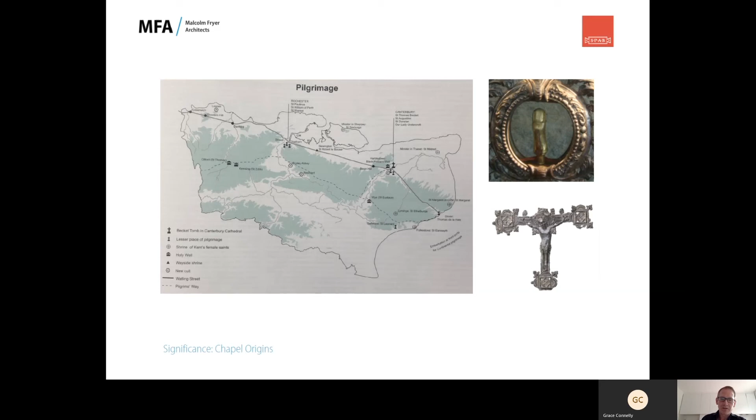What the chapel may have housed as part of that pilgrim's trail is not known, but there are all sorts of theories. It's very important as part of this pilgrim's trail through Kent, and how that has evolved over time in its relation to Boxley Abbey proper.

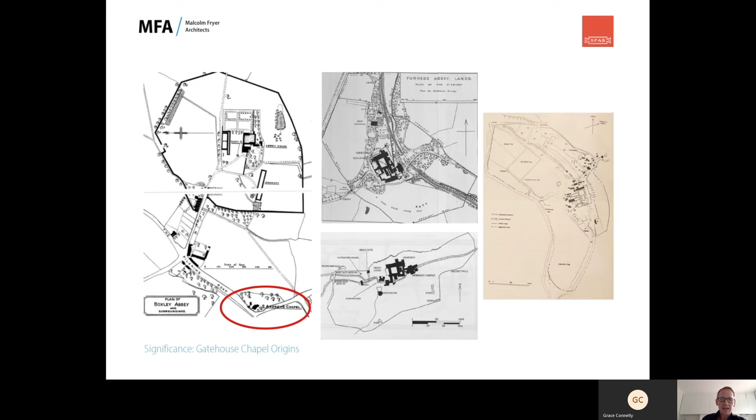So the chapel is here on the outer precinct, with the abbey within the inner precinct, and how this has evolved over time as the abbey was converted and the lands changed. The chapel has always held this pivotal point at the junction of several important roads, so we're trying to get an understanding of its relationship to the abbey and its precincts, and then looking at other comparative examples of Cistercian gatehouse chapels.

This gives you a sense of the scale we're dealing with. Obviously there are examples around the country: Coggeshall, Croxden, Rievaulx. Rievaulx is probably the most comparable in terms of size to Boxley, but really very, very small in comparison to some of the other ones that exist today.

There's also, interestingly, a timber-framed element attached, which could predate the chapel, which would again make it very unusual compared to the other comparative examples.

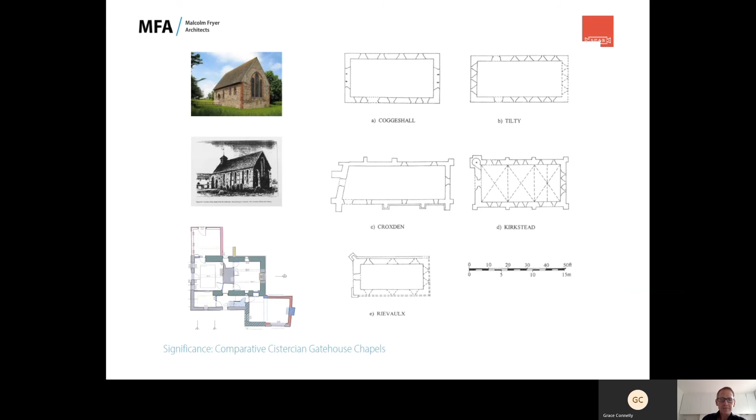And then we have other map evidence, truly trying to understand its setting as the abbey of old as a country house. But again, the chapel sits at this very interesting junction of three roads, and has quite a prominence to the south and to the west.

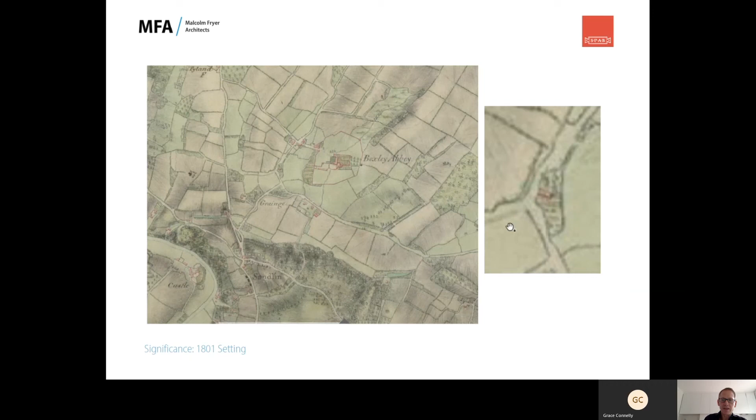We've done a bit of map overlays, looking at the changes that occurred during the 1800s and early 20th century, and how outbuildings started to be produced. We've overlaid with the existing map, and it was quite important for us to understand outbuildings and the different uses of the chapel. There was a post office in the early 20th century, and the outbuildings related to that, because that's part of the archaeology and an important consideration for how the site might be set out in future.

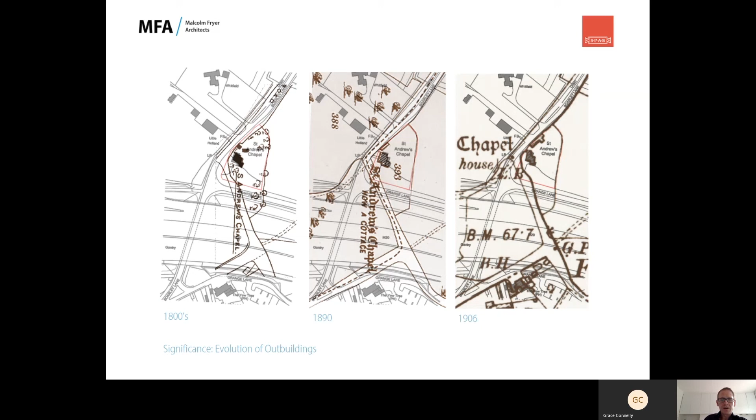So what we've got from these overlays is what we've got today, but looking at these historic maps, certainly from the 19th century, we've got a lot of outbuildings. That's quite important, with some longer ones along Grange Lane, and some earlier, smaller ones that were potentially additions onto this one.

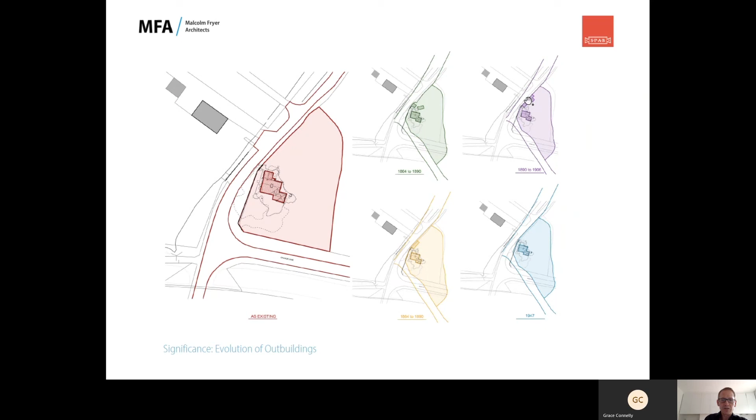So we know there were some significant outbuildings to the chapel during the 19th and 20th century that aren't there today. And then we have a couple of key views from before 1892, the works that were carried out there, and we have an 1892 publication by Kate Brown, which gives quite a good written description as well as a drawing. So these are the two views that we have.

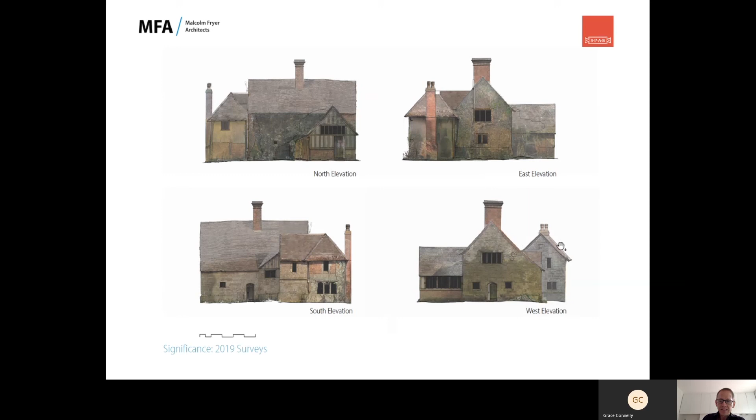But certainly the origins of the chapel are very clear in the volume as you break it down. And certainly the east window shows much more clarity in the brickwork now that the ivy has been removed, and the monastic outshot is much more evident.

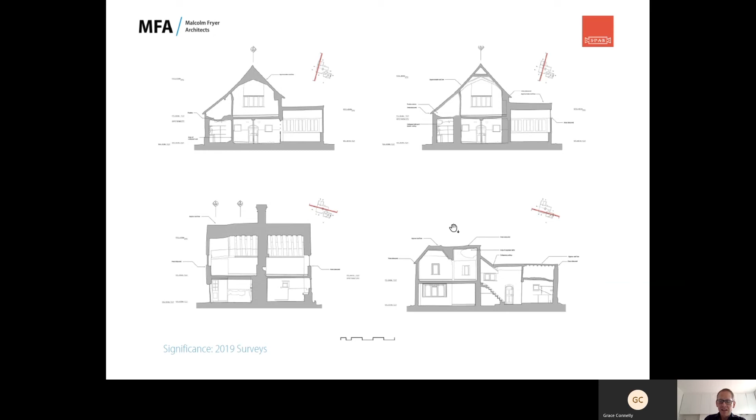Using digital technology has been extraordinarily useful. So going back to significance, we know the three key phases of evolution. We obviously have the monastic period, where we had the monks, the priest lodging.

I'm not entirely sure about the origins of this timber frame. It's not of a quality that matches the rest of the chapel, which raises a lot of questions about its origins - it's potentially reused or brought in from somewhere else. Like many timber frames, they were very modular and could be easily relocated, but we're hoping some of the archaeology will reveal itself through roofing works, etc.

So this is ground floor, first floor. We have the monastic period, and then the post-Reformation period where they added the aisle. Effectively, they pushed out the southern wall and the western wall in very high quality ashlar, then inserted this enormous chimney through the middle and created four rooms, two on each floor, as well as service accommodation on the lower floor.

The exact layout is still slightly unclear. There was potential that it was two dwellings at one point, but it's likely that there was a partition through here, and that the timber frame stood relatively independently here. We don't know entirely what's going on yet, but we hope it will all reveal itself in good time.

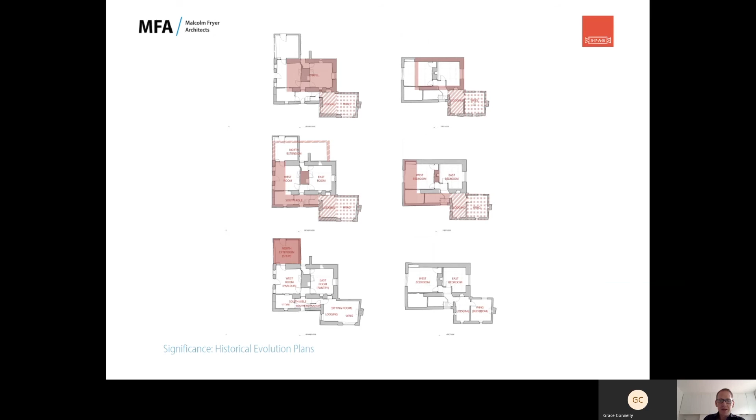So in terms of making sure we truly understand, we produce what we call significance evolution plans - historical evolution plans - really trying to make sure we absolutely understand the different phases of development. Susie Whitmore in our office has worked very hard on getting her head around it all from the various sources of information, and we believe this is an accurate summary of what we've got.

As I say, the big questions sit around the timber frame and its origins. We know it's early, but we don't know if it was part of the original chapel and priest lodging, or whether it was relocated there at a later stage. But certainly understanding some of the 20th century interventions, we know we've got pretty much an entirely new floor through the whole house, from that period of the late 19th, early 20th century work.

A lot of work was done then, and we think that there's a remnant of what was that earlier Pentice addition from before the post office was built in the early 20th century.

Hopefully I'm not racing through this too much. Matthew and Graham's talk gives us a lot more information on the history and significance of the chapel, but it's really important for us to get our head around all of this before we start work on repair and thinking about interventions, so we have the clearest understanding.

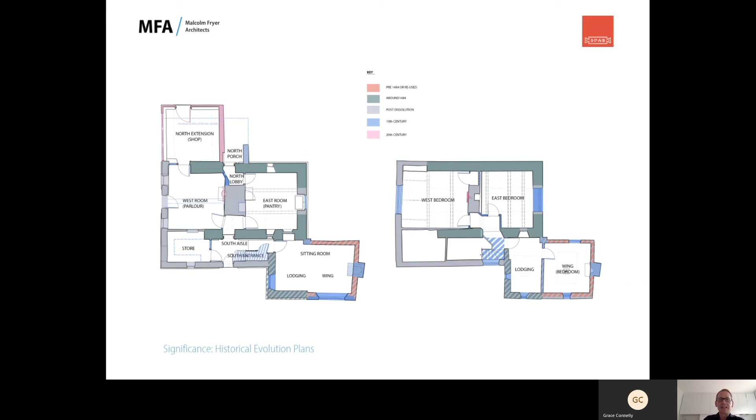And then something that's quite controversial for the SPAB is significance plans, where we try to rank what's the most important, between high, medium and low, and how that should inform decisions that we make.

As I say, the SPAB don't sit comfortably with the idea of significance. The SPAB approach is about valuing layers of fabric and development, and the idea that some layers are more important than others does not sit quite comfortably with the SPAB approach. But we still feel it is an important thing to do. It's one tool in a palette of the work that we do, but it does also start to create potential for where we might think about intervention.

So a lot of thought about high, medium, low significance. The low elements tend to be the more modern ones, the fireplace that's been relocated here, and certainly the post office. And then the highest, obviously, being the origins of the chapel, but also the post-Reformation stage as well, which are a really important part of the history of the building.

So I won't dwell too much on that, but yes, significance plans are important. But they are something that is challenging in terms of the SPAB approach to appreciating all layers of fabric and development.

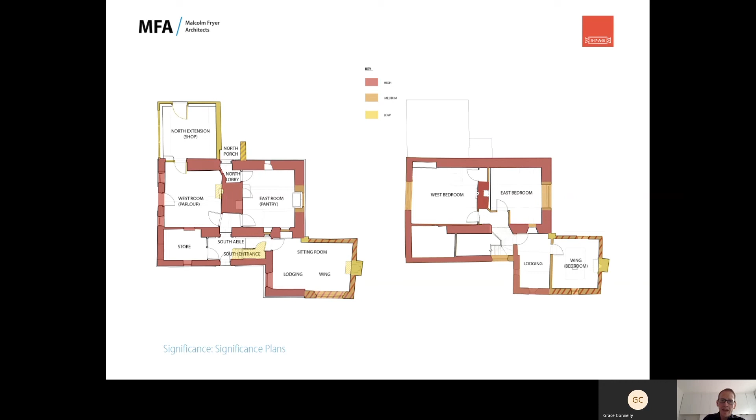So, and then we've got the setting today — well, it says 2019, but it hasn't changed. The motorway works of the late 20th century have completely altered the setting of St Andrew's Chapel, and are really probably the main contributor towards its becoming disused.

But it sits — when we first came across it, it was a house in the woods, completely overgrown. Didn't know it was there. This massive Leylandii hedge, but also a lot of self-seeded planting around the site. But the site is effectively this corner here.

So, a really challenging setting, both in terms of the access, which has been completely altered and restricted, but also in terms of the acoustics, the issues which are created by this motorway, which is raised, and there is now an underpass under here.

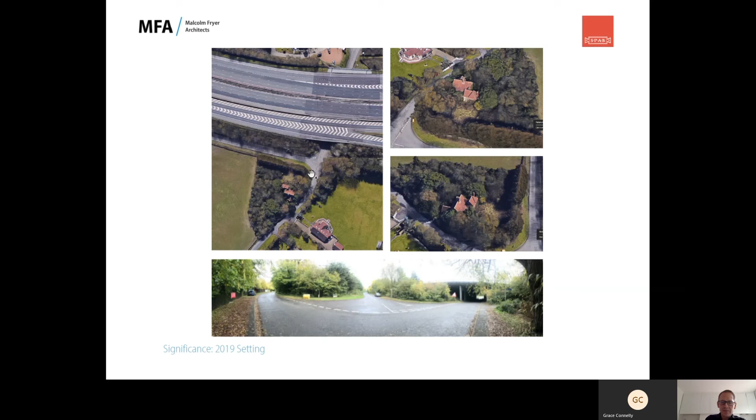I'm sure there's lots I should tell you about the setting today, but certainly the best thing that the SPAB have done — well, they've done lots of very good things — but certainly the immediate things that we did was starting to clear some of the planting on the site, so that the chapel revealed itself once again.

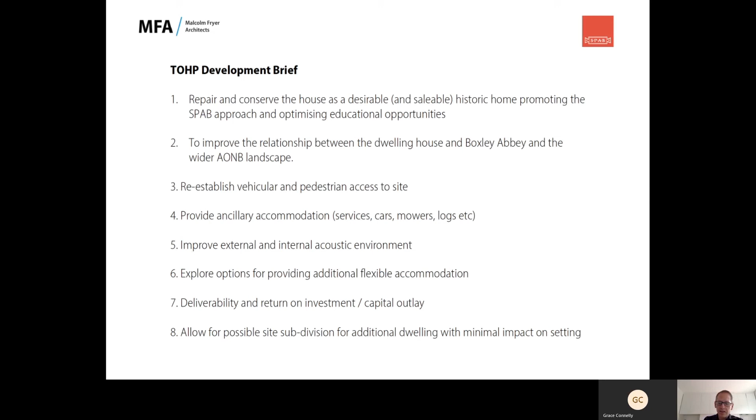And we've also been challenged to see if it's possible to subdivide the site and get an additional dwelling, which wouldn't have an impact on the existing one, and that's something we have looked at - not just about helping to offset some of the costs of repair, but also to address the importance of all sites being part of the housing crisis, and whether they should be able to address it in some way, or that maybe the second dwelling was a way of keeping the existing dwelling more contained and not having to extend it in some way. So looking at various options for the site has been a really important part of our work.

And I can't not go over the SPAB approach, which is incredibly important to all of us as scholars, and it really is about low intervention, about the use of the right materials. It's about retaining as much historic fabric as we can. It's about appreciating the patina of age. It's really about repair and not restoration.

I will go through the list, but actually I'm not - it's a respect for age. But the most important one, I think, for us is this essential work only. We're looking at things like the roof, whether we need to completely replace it to do upgrading work, or if there's a way that we can undertake gentle repair that will prolong the life of the roof and keep its wonderful character. And so there's been some big discussions.

Getting the materials right, proven methods, the importance of good craftsmanship, but also certainly an important part of our work is about good new design and how it can complement the old. And then looking at emergency works and making sure that we are getting on with everything we need to at the moment.

I would highly recommend the document that's been written by Matthew Slocombe on the SPAB approach, which gives a bit more detail about how the philosophy is applied to architecture projects, and makes the manifesto slightly more accessible in terms of the way that we can apply it to projects.

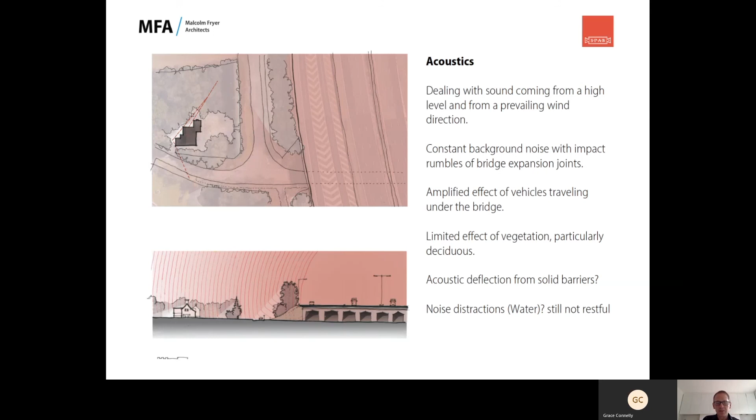So it started us thinking about how any development should try to extend that acoustic calming effect of the site. So a big part of our site layout has been about thinking how we can address the acoustic issue.

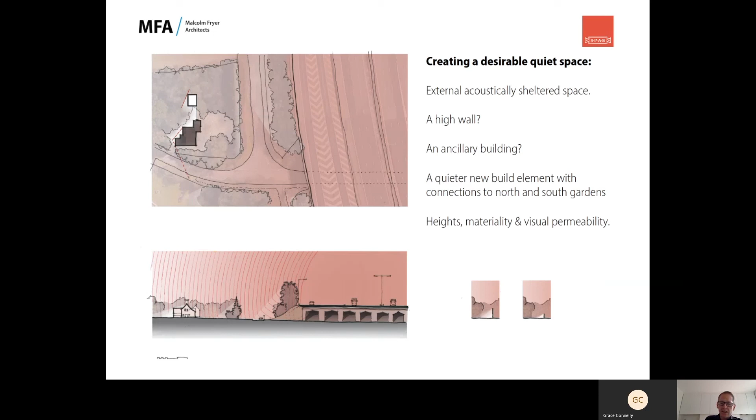Given the southern approach, with the existing pedestrian gate and the post office addition, off the new road, Grange Lane, our instinctive response was to restore a southern approach and think about getting ancillary buildings in this location. The main entrance has always been from the south as a dwelling house, and we felt that was quite important - I talked about that elevation that is so incredibly charming. There is a secondary elevation to the road to the west, which has the historic post office entrance.

But we felt that reinstating this as the primary vehicular entrance made sense - this is a much quieter road, whereas the other is a bit of a rat run. It felt like the right thing to do, restoring some sense of the setting of the house, and thinking about where ancillary accommodation may help with some of the acoustic issues. It also made sense, if you subdivided the site, to have access on the two outer corners. So that was our initial response.

It's been interesting that it hasn't changed very much, and we now have this permission in place to get that new opening, which is going to be very helpful for undertaking some of the works we need to do in the immediacy.

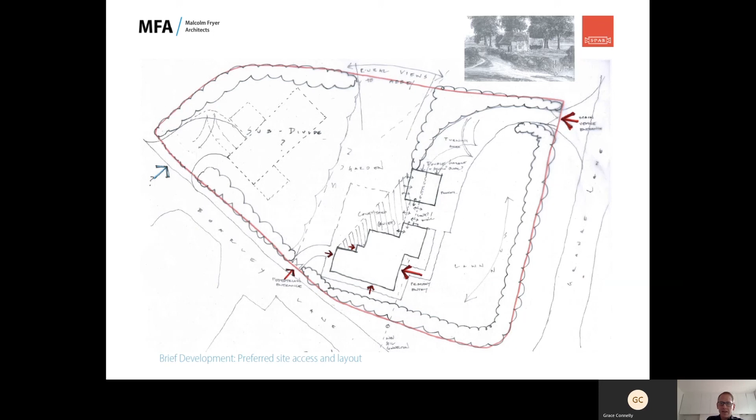Then it was about thinking about the house, and again where the entrance might be, really doing as little as possible in how it might be laid out - where the kitchen might go, where we might get services, all trying to stack up the services. There were two options really: we either had an entrance via the old post office from the north,

and that would bring all the plumbing around from that way. But we actually felt that with all the structural considerations, reinstating an entrance to the south, with a secondary entrance from the north, really worked quite well in terms of the layout of the house - two reception rooms, using the post office as a study cum garden room, and using the one really decent sized space on the ground floor as a kitchen and dining room, and how that manifested itself.

Where there are structural issues in this southwest corner, we looked at how we could potentially get a small bathroom as an ensuite to the upper floor, and a utility room - we'll talk about that later - using the intervention in this corner to hopefully deal with some of the structural issues also. We felt a lot more comfortable with this southern entrance intervention, having 3 bedrooms upstairs. There is the challenge of how to create a bathroom, which I'll talk about more, but certainly we have moved forward with this option with the southern entrance.

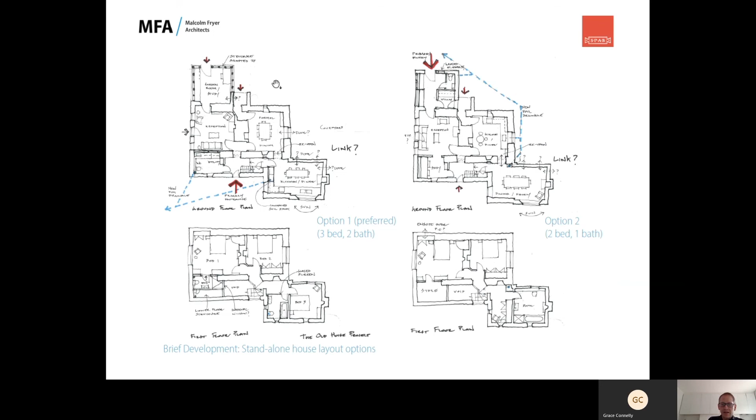At the moment, what we're looking at is a layout with very few changes: two reception rooms with a central fireplace visible from both sides, reinstating that main entrance, and turning what was the post office store into a utility and downstairs loo, with a tiny ensuite above it.

That does involve doing some substantial work on that floor too, which we're hoping will be combined with the structural improvements that we need to do.

It's then looking at potentially making a new opening from this garden room here, and reopening the entrance that's been blocked between the priest lodging and this reception room, so that this would make a really great kitchen and dining room with a connection back to these reception rooms.

It's a very low intervention layout. As I say, there are about five changes. One is reopening this historic opening. The second is about this corner and stacking up all the bathrooms.

Stacking the utilities on this side of the site means we can get a fairly easy run out. The advantage of having the kitchen down here is that any bathroom waste and plumbing could all be internalized and kept within the reversible joinery, so nothing would be seen on the outside. It's a very low intervention alteration.

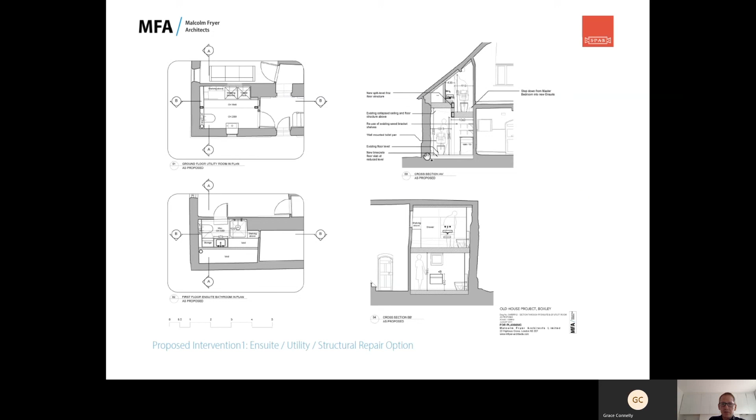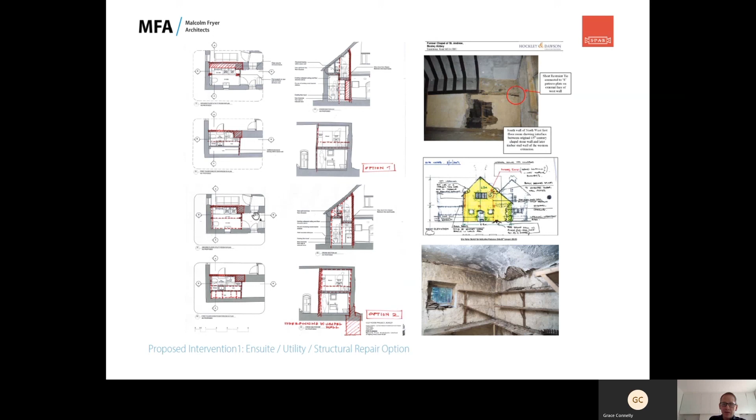So again, it's about how we can use it to address this major structural issue on the upper floor. As I say, this is the lower floor where you can see the dilapidation, but there's a real need to tie the historic masonry back to the earlier chapel masonry, and we're hoping we can do that while introducing new facilities.

Then, slightly more controversially, is how you might partition a bathroom in a space of significance. It might be a little too New York lofty for Boxley St Andrew's Chapel, but it's about how you might introduce a screen to bring a bathroom into this space, which is not insignificant.

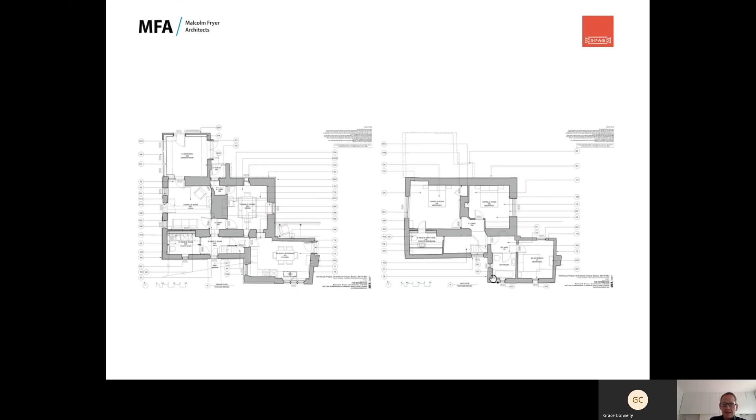We want to make sure we can still appreciate this space while getting the connection through to the all-important third bedroom. So the intervention would be a reversible glazed screen here to create a second bathroom.

I think it might be played down a little and maybe just glazed on top, but the starting point is something relatively translucent that allows you to appreciate the volume of a room, even though it gives you some acoustic and visual privacy.

And then, looking at reopening this blocked opening, which was between the chapel and the priest lodging, that will effectively be between a reception room and the kitchen and dining area.

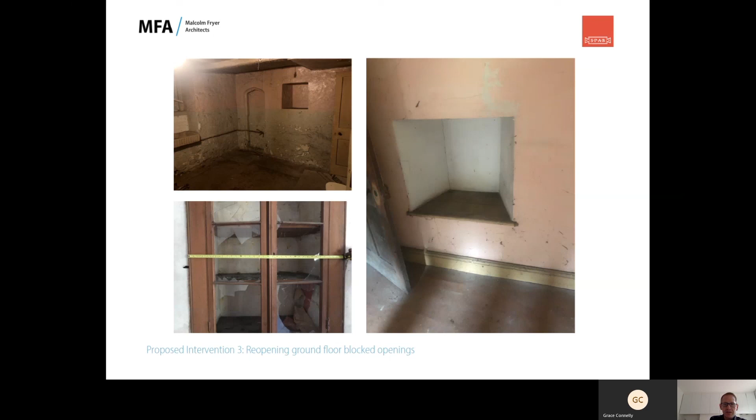And there are elements of 20th century joinery that we would definitely need to look at how we could reuse, and that's on the other side of this opening. So nothing wasted, but certainly we feel that there is significant advantage in getting that reopened.

And then we've got this, the corner of the timber frame here, to the east, where we've got some fairly significant structural issues. The whole frame has been underbuilt with rubble at some stage, and it's at a much higher level than this great big concrete gutter, pretty much holding the whole thing together. The sole plate is heavily degraded in a lot of locations, but also there's a new slab that has been dropped at low level, which has all sorts of damp issues.

And the challenge of what we do here - what was interesting is that this area here doesn't have a sole plate, and was also where the chimney sat earlier, before this fireplace was put in the late 19th century.

So we do feel that this is potentially, at the same time as addressing these structural issues, an opportunity to consolidate and drop this floor level, this ground level, safely.

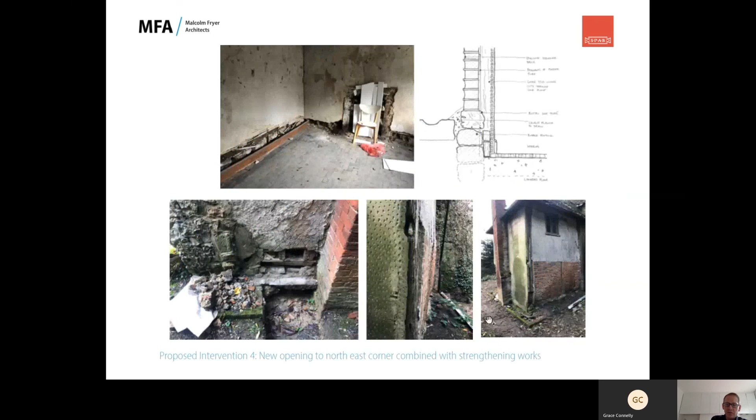So that's something that we'll be doing very carefully in the near future, looking at the ground level around here, and the exact state of this masonry that exists behind this modern drain. But certainly we feel that that's the most comfortable place to create a new opening, and that does unleash all sorts of ideas about what you can potentially connect there.

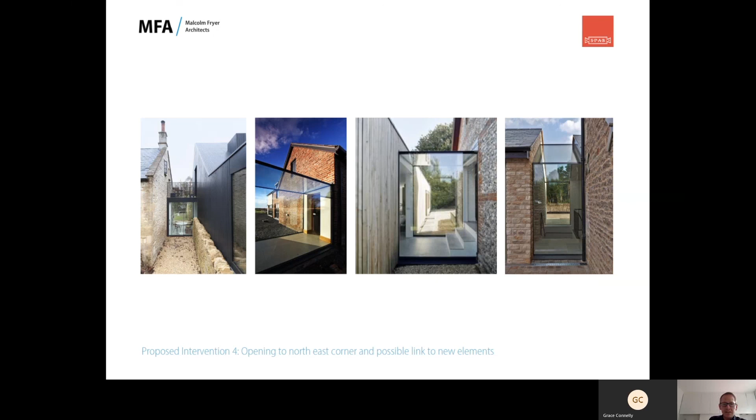It is a little bit of an architectural cliche, the glazed link, but it's actually quite an important tool in architecture. In this case, acoustically, it could help to provide some real benefit, but also just an opening up to the garden and those incredible views to the south, west, east, and back to the abbey. So getting an opening where we feel we can connect further was quite an important strategic consideration, and we do feel that this is the one place that's possible.

And how you do that, and how you might connect to more modern development - we do feel that there are sensitive ways which allow you to still read the building, but can also help to weather some of the historic fabric. But there are good examples around, and it did start to unleash some potential.

One of the things that is extraordinary about the wider Abbey site is all of the walls of brick and ragstone, and there are a huge number left, and the SPAB have been doing a lot of work during the working parties to consolidate and repair the walls, to help them to weather.

But we were quite interested in things which have been over the years built into the walls of the Abbey, and the idea that openings are just created in what does appear to be a garden wall, but is actually sort of grottos and storage and penthouses and lean-tos and things like that. And that did get us thinking about how we might be able to address the wider development of the site.

And yes, just the romanticism of openings in a wall, but the idea that things can be historically concealed behind them. So thinking about the development of the site, we've done a lot of really boring 3D modeling and sketching just to see how different volumes might impact on the historic volume, thinking about ancillary accommodation.

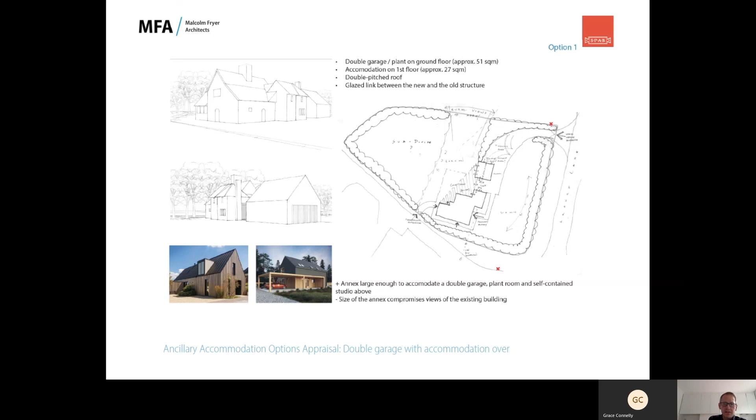It's not a big building, and it's very easy for new development to have a significant visual impact on a building. So just putting a garage next to the site and modeling that was slightly terrifying - it really did dominate and was far too close, and would really have a negative impact on the overall volume and setting of this wonderful historic building.

So thinking then, okay, we'll do the opposite, and we'll take it right to the other end of the site, to the boundary, and have a protective wall between the two, that could help to create a much more private garden to the north of the wall, and address some of the acoustic issues. Certainly that's been a big part of the design development work that we've done.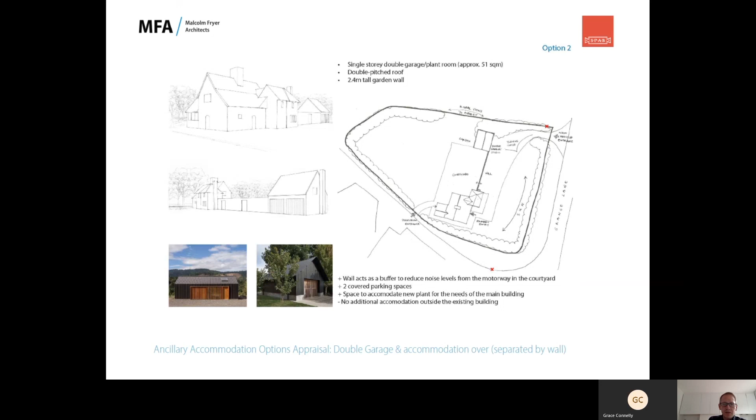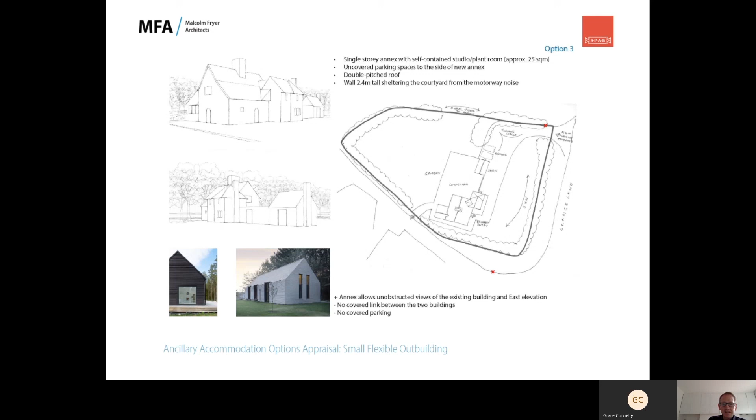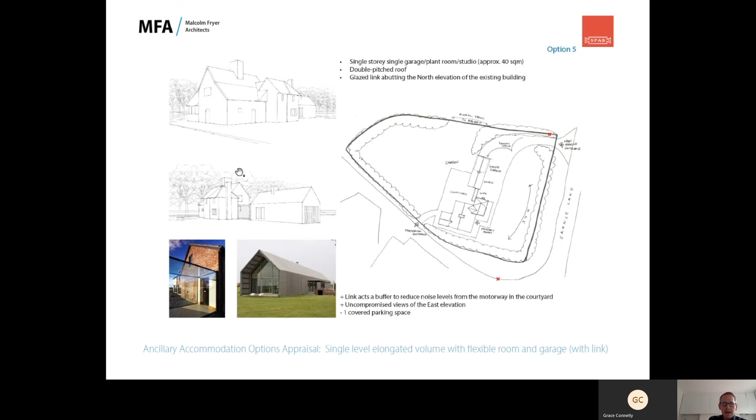And then thinking about, well, maybe we could get a smaller development as part of that wall, a bit closer to the building, working with volumes and materials that could still be quite sensitive, and how that might be used as some accommodation close to the house. Thinking about the volumes and different ideas along that, and what impact it might have in terms of the views of the existing building, from probably the two key views that we believe it to be, so loads and loads of considerations of what we might end up with.

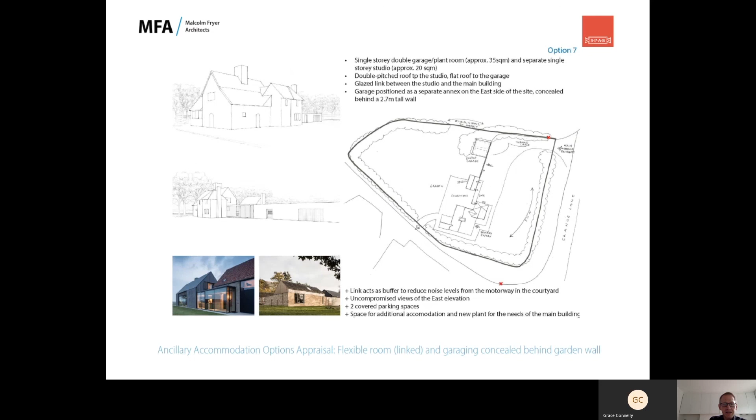The idea of hiding a garage behind a wall, and having a slightly more expressed addition closer to the house, but of a smaller scale, and the importance of the materials that are still available locally.

It is very much both the abbey walls, and very much parts of the St Andrew's Chapel, about Kentish ragstone, which traditionally is used a lot more in rubble than it is as ashlar, fine stonework. It's interesting that the way it's quarried now, very close by - I think Gallagher's quarry is about 3 miles away - it does come out mostly as rubble. It isn't cut out as block, which does mean it is very much leaning towards a use as rubble, skilled beautiful rubble, but still rubble nonetheless.

And they were quite interested in how you could create openings using traditional materials, and we're kind of interested in the idea of these squint windows that are found throughout the chapel and the priest lodging, and how we could interpret them in a contemporary way. But certainly this incredible palette of ragstone and brickwork found throughout the site is something we're keen to think about in contemporary ways, as well as the historic forms of gables and these squint windows.

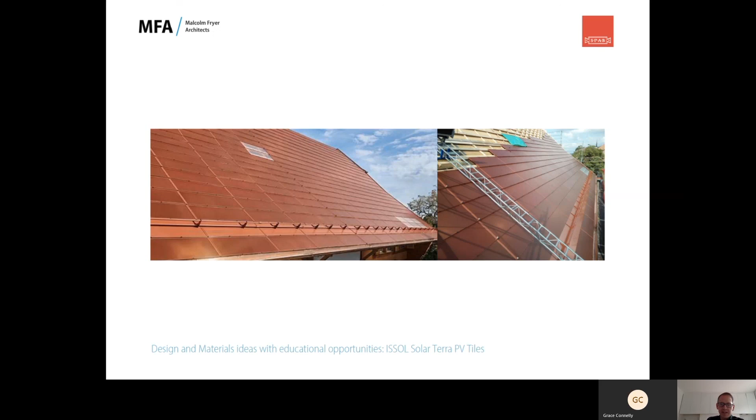And also looking at the potential for educational opportunities. The idea of an oak frame that could be built by volunteers as part of a working party is an important part of the consideration of the design of any development that might be planned.

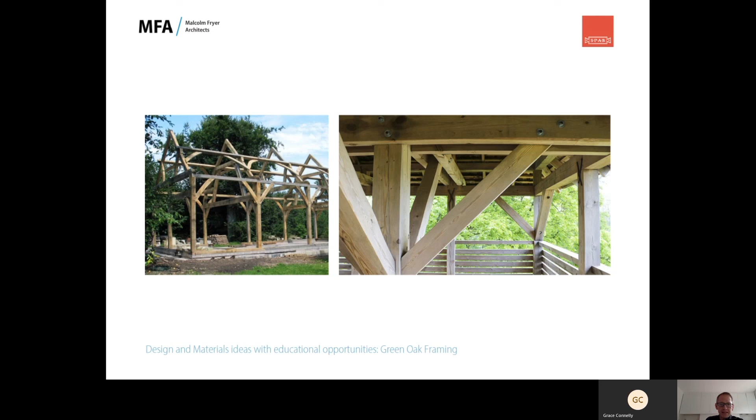So where we are at the moment, we're interested in the idea of keeping the garage on the northern perimeter, but maintaining these important views through to the eastern elevation, and maintaining these lovely views through to the chapel, to the abbey.

We're still exploring the idea of a second dwelling potentially, but certainly the importance of this wall which will help to create a much more private garden to the north of the existing dwelling, and then the potential to create a very light touch porch between the wall and the historic building, so that we could also form a porch or a garden room that could link to both sides, but very much giving the historic building the breathing space it requires.

And thinking about the garage being very much an opening behind the wall, and potentially having PVs on the roof, so that the whole thing reads as a very low landscape that allows you to read the trees behind, but certainly gives the chapel the breathing space.

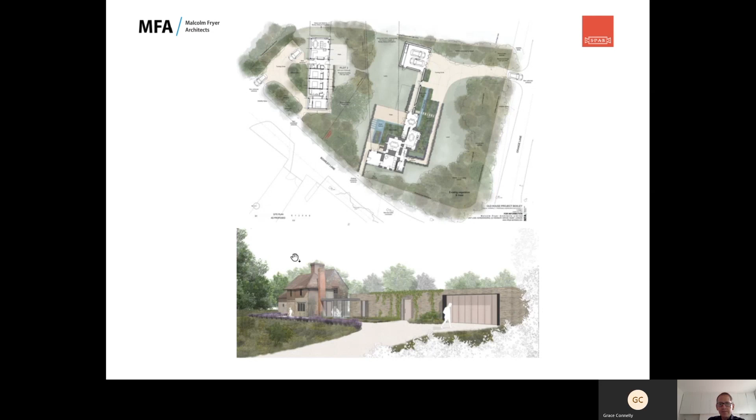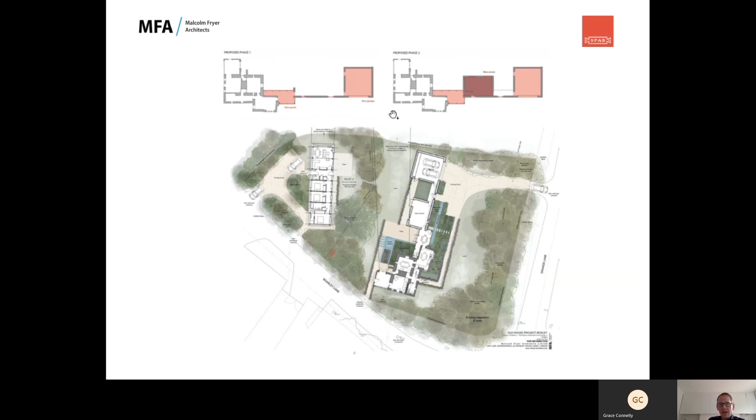And thinking again about whether, if that was the starting point, it would be possible to add some further accommodation around there. Using this opening we've created, we're seeing whether it's possible to create some additional space that would work well with the garage and garden room accommodation, but maintain these important views through to the east. We've been playing with some ideas about the subtlety of that, and we think it's possible while keeping the significance and the setting of the chapel.

We're talking to the local authority and to Historic England about these ideas as part of the pre-application process, and they've already come back with some interesting feedback. Generally we're going along the right lines, with some elements of detail for further discussion, but certainly the idea of materiality tying into the ragstone of the historic building, used in a more contemporary way, thinking about these squint windows as a way of reflecting the historic forms found through the abbey and the chapel.

I'll get it right one day.

Using these materials in a contemporary way could be quite an interesting educational opportunity, doing dry stone or even wet ragstone rubble walling, but in a fairly square and contemporary way. We feel that could be really interesting. But certainly it's all about restoring this southern setting and southern approach in a way that gives the historic building its dignity and breathing space back.

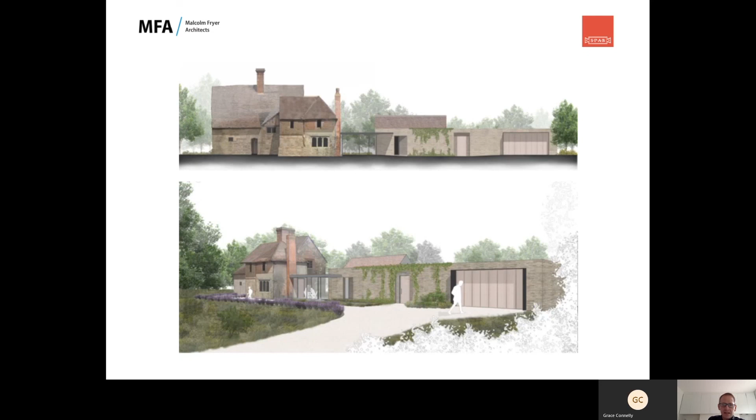We've also been looking at the idea of maybe bringing the garage a bit more forward and hiding some of this development more behind. Some of the other ideas we're looking at involve having a slightly more prominent garage on the boundary, bringing it forward, which is really about widening up these views and giving a slightly bigger garden, while optimizing this perimeter with the views through to the abbey.

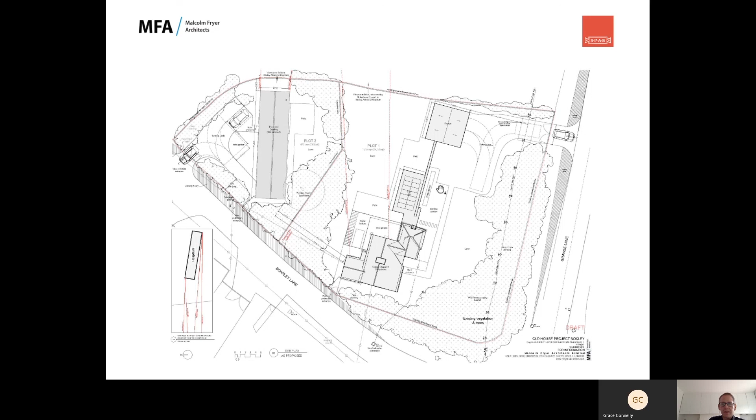So we're still very much a work in progress, and we're testing and modeling different views at the moment. The idea in this option would be to conceal everything behind this wall as a low-lying pavilion of living accommodation, which may again have a connection through to this kitchen and dining room in the main house. So very much a work in progress, and subject to pre-application advice and all sorts of consultation.

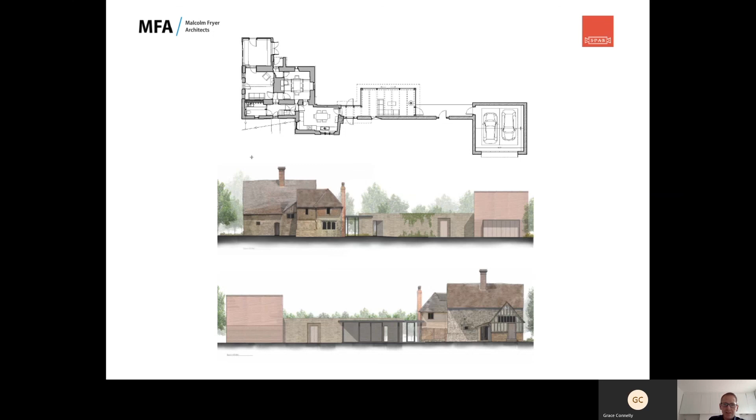With this option, we're actually looking at how we can burn some of the clay that's on the site to create a peg tile that we would then use to clad the garage, both as tile hanging and as roof cladding in a slightly contemporary way. So really thinking about materials as well as the craftsmanship and the educational opportunities, but certainly the importance of good conceptual design that's sensitive to the historic building, but very much of its day, of its zeitgeist, which is a very important part of the SPAB approach. But certainly very low intervention when it comes to the historic building itself.

Just to give you a sense of what a second dwelling may be, if the local authority supported it, we'd very much think it should reflect a rural vernacular in a contemporary way, and how it would sit in relation to the chapel as viewed from Boxley would have to be something very low key and very much secondary to the chapel on the site.

And that's a kind of view as it would be, with a second dwelling hiding in there, but certainly reinstating a very strong visual connection between the Abbey and St Andrew's Chapel is a very important part of our proposals.

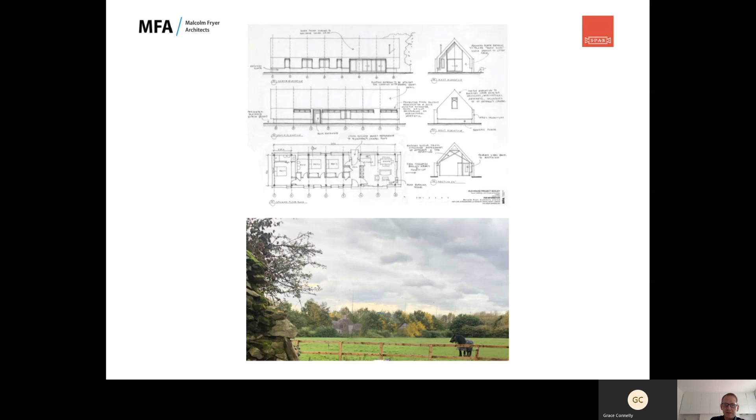So to talk a little bit about repairs, I don't know how long I've been going for, but probably too long.

Obviously the repair priorities, as Matthew talked about in the last presentation, are the structural stabilization of the west elevation. We've been doing a lot of monitoring and measuring, and looking at proposals. There's obviously issues with both the superstructure, everything above ground, where the walls aren't tied in effectively to the historic walls, and the substructure, the foundations.

So we've got both going on, and it's an interesting debate about how you can address the two integrally, with the SPAB approach being one of lower intervention if at all possible. That's a work in progress and a very interesting topic of conversation for many on the technical panel and beyond. We're also looking at more basic structural repairs to the east timber frame, probably in the context of a new opening that would help strengthen that, and the renewal of roof finishes and rainwater goods, which is an emergency, high priority project at the moment.

Looking at perimeter ground levels and drainage, really important. There's all sorts of damp and groundwater issues on the site, and getting those levels and drainage sorted out sooner rather than later will really help the building to dry out. Basically stopping the water flowing towards the building and hopefully flowing away, and that will be part of the working party activities fairly soon.

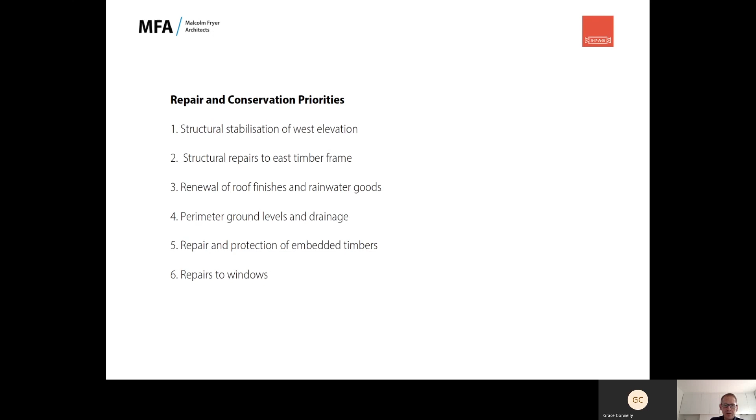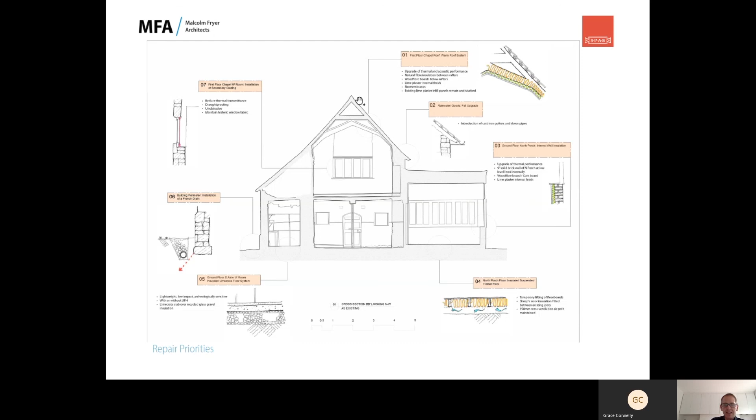So really, at the moment we've done a full condition survey and come up with repair proposals. But interestingly, also thinking about sustainability, upgrading, and things like secondary glazing, we actually feel there are opportunities to upgrade the fabric of the building with insulation, primarily this main roof, in a way that is reversible and is actually an interesting reflection of the history of the building.

So at the moment we've got, these timbers were never originally exposed. They were originally faceted, like the post-Reformation addition. So there was lath and plaster over these timbers, which exist on the top floor of the west, of the top floor of the entire chapel.

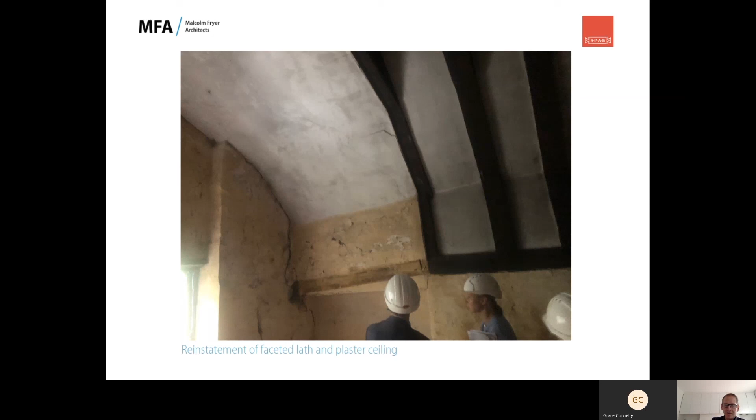And we do feel there is a strong argument for getting insulation back between those timbers, keeping all of the Victorian plasterwork, but getting insulation back between those timbers, and really doing a lot to thermally upgrade the building, and reinstating the lath and plaster finish over those timbers.

It is reinstating something that we know is there. It does probably bring some element of significance in terms of reinterpreting - and I'll try not to use the dreaded 'restore' word - but to reinstate something that had been lost, that we have very clear documentation for. But it is also in the context of a very significant thermal improvement in the performance of the building, and we feel that's a really important justification.

And again, looking at secondary glazing, there's the idea of structural repair right down to renewal of the slab and insulation - quite a significant intervention, but all because it's in the context of a significant piece of structural repair. And then looking at opportunities for getting insulation, service runs, etc., wherever we can, but generally a light touch. Where we are making an intervention, we're utilising that opportunity to undertake multiple tasks.

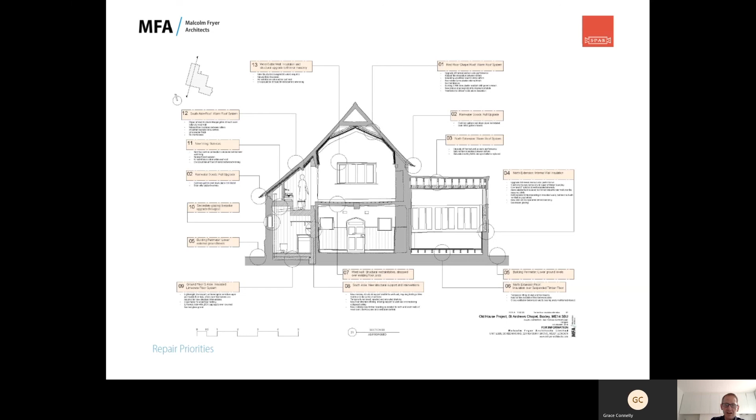Certainly, I was talking about the embedded timbers that we've got on the elevation and how we treat those. Really, the SPAB approach is about consolidation and just not allowing them to get any worse. It's actually a truss line that sits through this west elevation of the priest lodging, and how we can consolidate them and just give them the weathering they need to stop them getting any worse. We're thinking that maybe we may have to render areas of this, but considering what impact that would have on the visual appearance in this wonderful patina of age that we see everywhere on the building.

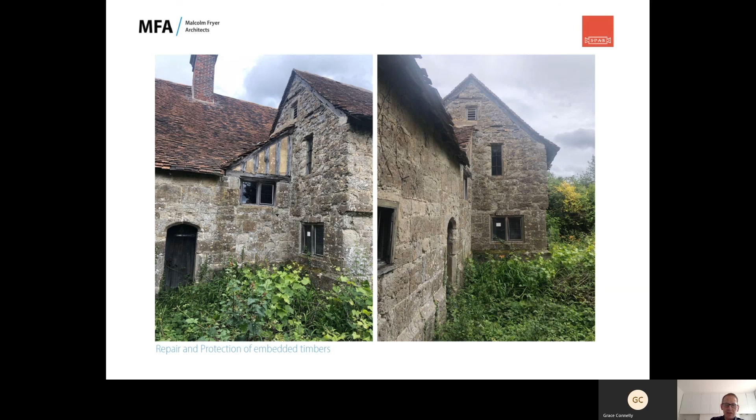Looking at the windows, most are late 19th century and all repairable, but to different degrees. We do feel that repairing the windows and adding secondary glazing is the right thing to do.

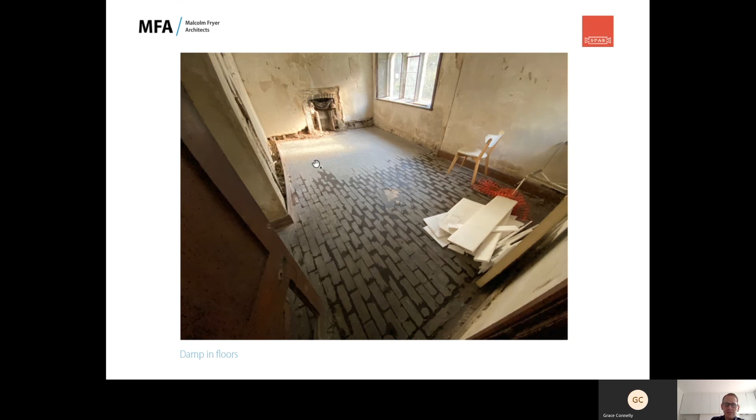Talking about the damp issues in the floor, some big considerations. The most important thing is to get the ground levels below those of the building, so we can start to monitor the damp levels still existing within the floor. We'd hope not to have to lift this floor and to keep it in its existing state—that's going to be a significant challenge. So we've got to sort out the ground levels around and go from there.

For repair considerations, thinking about slabs, we hope to keep them, but if we replace them we'd look at a very soft limecrete that we can get some insulation into. What do we make the floor finishes? They're pretty much concrete screed at the moment, but we've got these wonderful linoleum mats which could be absolutely wonderful if we can keep them intact and repaired, and how we undertake all the other repairs while keeping them intact.

And how we insulate the timber frame cavities while also protecting the historic finishes—there's all sorts of interesting ways of trying to insulate within a timber frame cavity. We've done some interesting thermal imaging, so at least we know where all the concealed timbers are.

The big question around the structure repairs to the west elevation is building control versus a low intervention SPAB approach—these are often slightly in conflict. But it really is about working with building control to do as little as possible, but as much as necessary, and to protect as much of the fabric as we can.

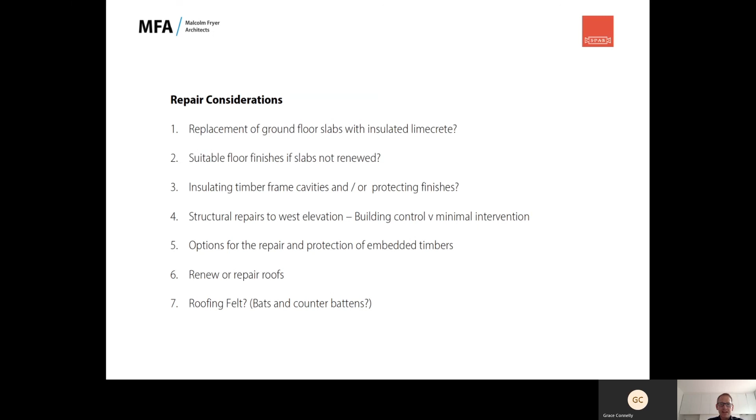Again, we've talked about the embedded timbers. I'll talk about the roof repair shortly, and this extraordinary ongoing question about whether we should roof felt or not—it's one that will be argued about eternally. But I think in this case, because we're just taking a repair approach, there will be no new felt going into the building.

The works we're about to undertake on an emergency basis are really trying to sort out the elements of the roof. We've done a huge amount of work with Richard Jordan and Ashford and Cranbrook Roofing to assess the condition of the existing roof and make sure we can repair it rather than replace it. It's very much in keeping with the SPAB approach, trying to maintain the patina of everything around it.

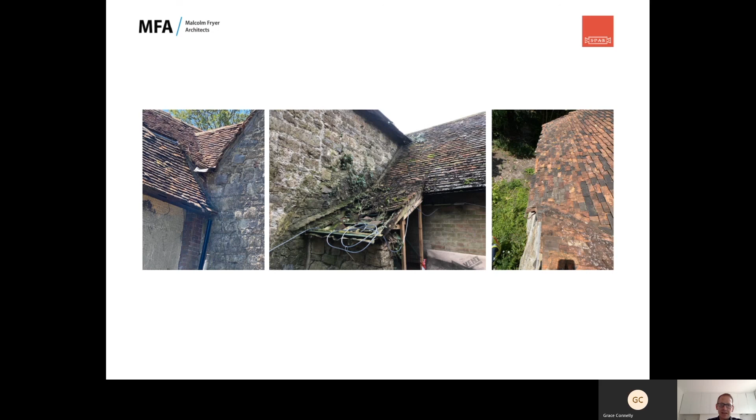We're putting up a full scaffold around the whole building, triple width, so that we'll be able to have people come and visit and have educational opportunities during those works over the next month or so.

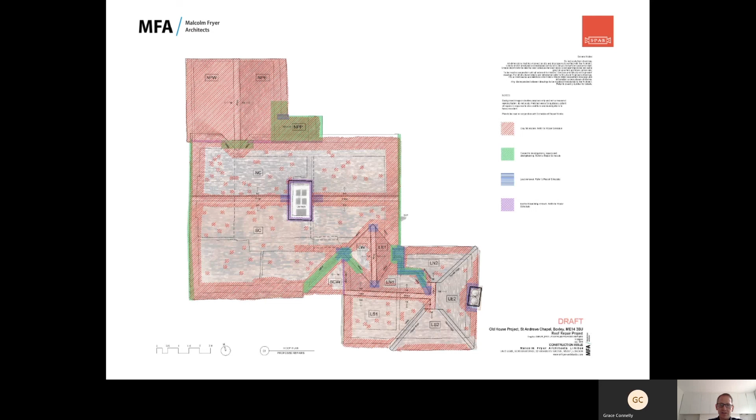I've spoken way too much. I'm sure I could talk about services and sustainability, but that's a very important one on the agenda—making sure we can get services in a way which are concealed and don't have a detrimental impact on the beauty of the building, as well as the archaeology below ground, certainly in terms of rainwater and foul connections.

Also how we can bring in secondary glazing and insulation elements, potentially PVs on new elements, and how we heat the building—whether we look at a long-term ground source heat pump to make it as low energy as possible. If we can avoid gas, even though we've got a huge gas main through the side, it would be lovely. But really, what we can do to be an exemplar environmentally, as well as in a conservation approach.